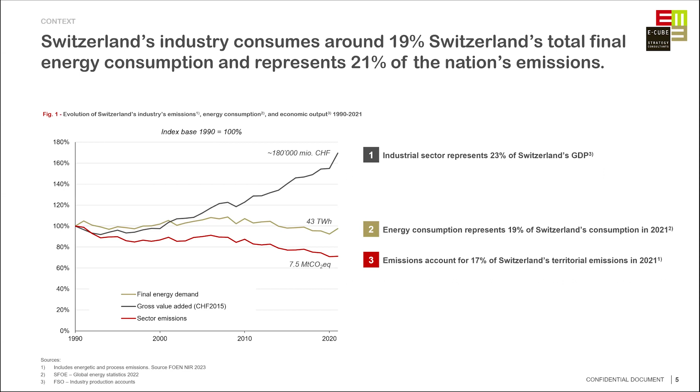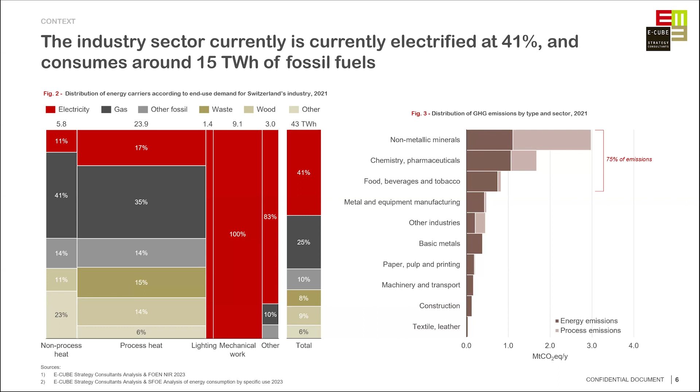And we can see that in terms of just energy emissions, the order is still approximately the same, which are the emissions that electrification will primarily focus on. So one might ask, why should we actually electrify our end uses and not just use other technologies?

So the idea behind it is to simultaneously reduce energy consumption because electricity is more efficient. For the same given service, we could decrease the final energy consumption, and this would affect our infrastructure demands. So if we use much less energy, we would need much less infrastructure. And this would also impact a lot the supply of energy in Switzerland, which is quite dependent on foreign supplies of fossil fuels, since we do not produce fossil fuels at all. And we do know that Switzerland's grid is quite low carbon and that the European Union's grid is getting cleaner.

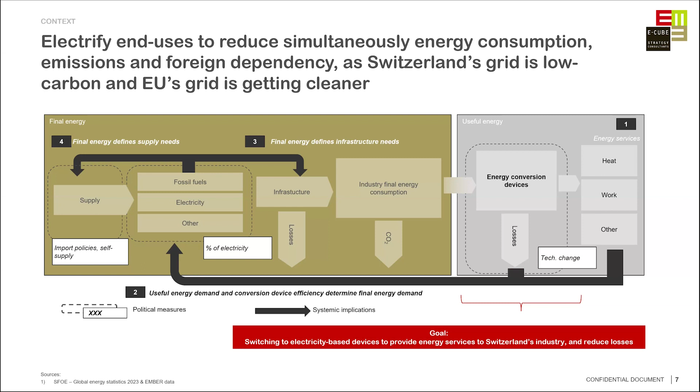So we're at, I think, almost 70% low carbon in 2023, if I remember well. So that's the goal: really switch to electric-based technologies for the same process to reduce energy consumption and simultaneously decarbonize because of the low carbon grid.

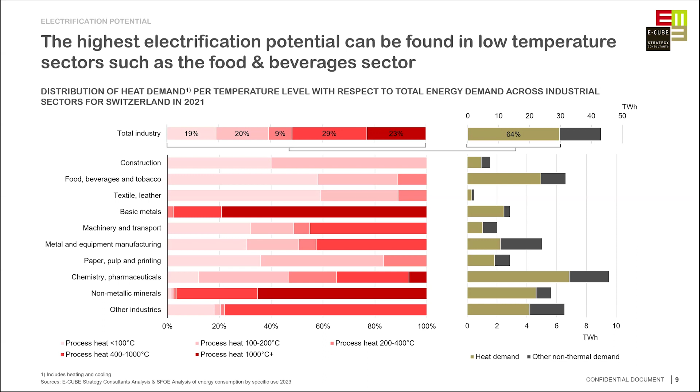And if we look well, we can see that the food, beverages, tobacco, textile, leather, and construction sectors have quite low temperature demands, and the food, beverages, and tobacco sector specifically has quite a high energy consumption, which is the second highest in Switzerland for heat demand. So we do notice that there is quite some potential, especially in low temperature sectors.

And so when we defined the electrification purpose of the industry, we really wanted to focus on a more realistic approach. Theoretically, we could replace all processes, electrify them all and get 100%. But that's not the idea behind the study. So first of all, we wanted to define specific stages of electrification. Stage one being just entry point electrification of non-process heat. So it's really heating buildings as well as hot water, everything that is not related to the processes themselves.

Stage two is electrification with more mature technologies, so what we would consider electric boilers or industrial heat pumps, and it goes up to 400 degrees. And stage three is more focused on technologies that don't have a high certainty of costs or technology maturity, and these go up to more than 1,000 degrees.

After defining stages of electrification, we wanted to define where we could and could not use electrification. So the idea was to not switch existing low carbon technologies that were already in place, such as industries that already use solar heat, district heating, as well as wood. And we do have some industries that use quite a lot of wood. And also some industries have specific resource uses, such as, as I said previously, cement industries, which use quite a lot of waste, as well as chemicals.

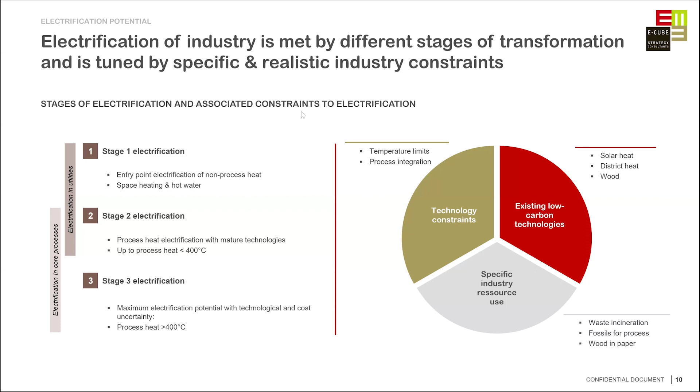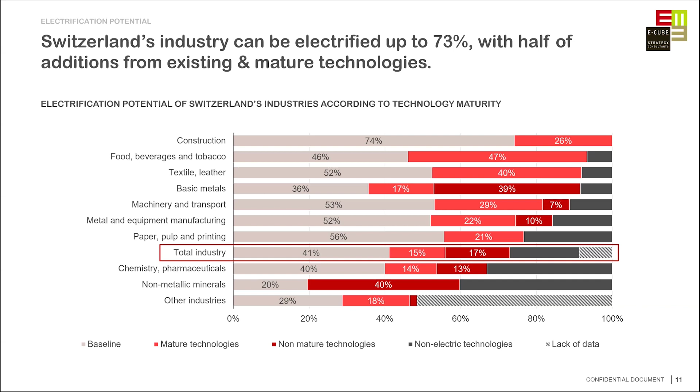So basically, what to remember is that there was also a lack of data for many industries. So the 73% could go a bit higher if we had more disaggregated data for the sector. But overall, we were at 73% of electrification potential. So what would this impact on the Swiss landscape?

So in 2021, as stated previously, we were at 41% of electricity, with 35% being fossil fuels out of energy consumption, so around 15 terawatt hours. And through each electrification, we're able to actually reduce final energy consumption by 21%, while simultaneously increasing electricity demand by 7 terawatt hours, which is approximately 11% of Switzerland's annual electricity consumption. So it's not negligible, it's still present, so around 10% of increase.

And what happens is that fossil fuels are basically virtually non-existent, with gas and light fuel oil being removed, the only remaining fossil fuels being very specific fossil fuels for chemicals industries such as naphtha or a little bit of coal for example, the ferrous industries, because we did not focus specifically on the process, just on heat production. So we do have quite an important result here. So reducing energy, our objective is reached while increasing electricity consumption.

And as we can see, the highest electricity consumption jump is between stage 2 and 3. And this is where actually electrification becomes less efficient as opposed to what we usually think of heat pumps. So the increase of electricity is much higher despite a small reduction of final energy consumption.

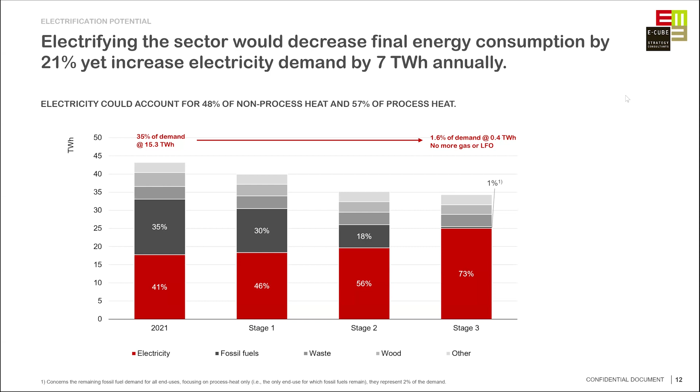So in terms of sector focus, the highest decrease, as we could really estimate, would be the food, beverages, and tobacco. So we can actually decrease their energy consumption by up to 44%, which is really consequent for such a sector. And also chemicals and other industries and metal and equipment manufacturing have some quite important decreases, but not for the same types of stage reductions. So important reductions for different sectors, but not equal reductions. So for example, basic metals or non-metallic minerals. So the sectors that are really heavy and high temperature don't have such a high reduction.

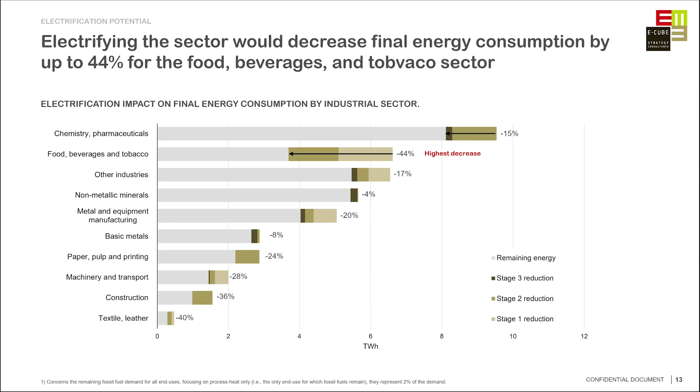And in terms of emissions, so we can actually quarter energy emissions. So really the core aspect of electrification, which focuses on combustion from fossil fuels, and reduce them actually by up to around 45% using only mature technologies. And what we see is that there's really two main things that are really important in terms of emission reductions from electrification. It's that process emissions still remain. So there is a need for alternative technologies to cover these process emissions, or electric technologies that can directly implement themselves within the process. Some technologies do exist, such as, for example, in the chemical sectors for ammonia production, but it's really difficult to find actually data and economics for these technologies.

And another aspect is there is quite an important focus on the importance of a low carbon grid. As you can see, if the grid is not cleaned up, so if we have the same grid as today and not 12 grams of CO2 approximately per kilowatt hour, we can have an increase of more than 1 megaton of CO2 per year. So it's really crucial to have a decarbonized grid.

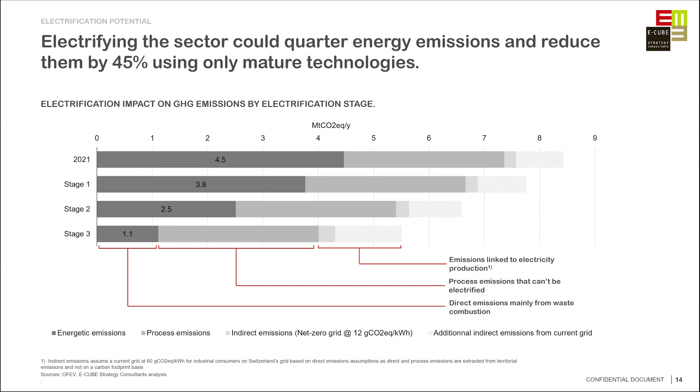And focusing again this time on industries, the highest decrease again is on the food, beverages, and tobacco. We can decrease their emissions by up to around 90%. Followed by actually metal and equipment manufacturing, because it's mostly processes that require heat, but not really specific processes that can be electrified, and basic metals as well, despite having a small reduction in final energy.

So we do see that there is an importance in electrification for specific sectors, especially low temperature sectors, which have the highest potential for emissions reductions. However, the results will really be dependent on what type of stage of electrification we're at. So for example, food and beverages, it's mostly stage 1, stage 2. So mature technologies, whereas non-metallic minerals, chemistry, or basic metals, it's stage 3, so much higher temperatures. So this will be really important in the economics and the feasibility against alternatives.

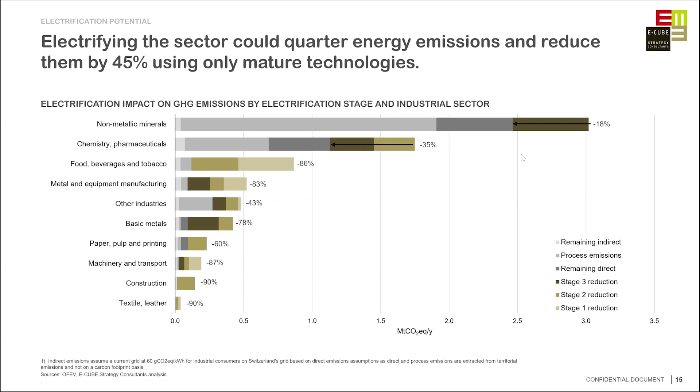So now that we've actually covered the potential, we can actually look at the conditions for electrification being competitive. And so the first thing is that success, so what I mean by success is really being competitive against other low carbon alternatives or fossil alternatives, is actually highly dependent on the electricity's competitiveness. So how performant electrification is and the cost of CO2.

So looking on the left side, we actually gathered a few actual projects in Switzerland, industries on heat pumps, for example. And the coefficient of performance of heat pumps is critical in terms of economics of electrification, because heat pumps have a high capex. So having efficient processes and reducing electricity consumption and overall energy consumption is really beneficial for the economics of electrification. And secondly is focusing on the CO2 tax. So when we reach approximately process levels of around 100 degrees, electrification is in the same cost range of gas in terms of levelized cost of heat.

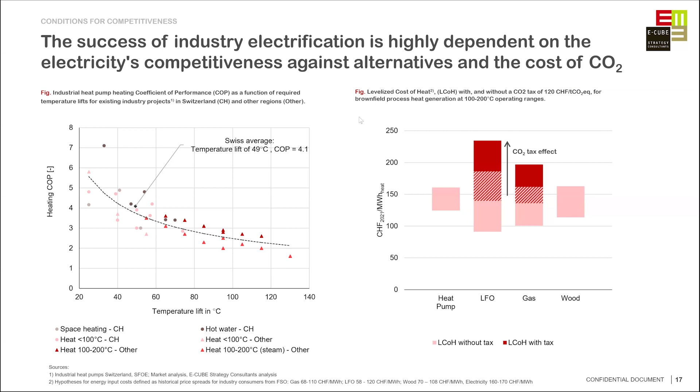So a CO2 tax would be really necessary to actually do a phase shift and actually render electrification cost competitive. So these are really the main aspects, which are performance and CO2 costs, but not only, as we'll see later on.

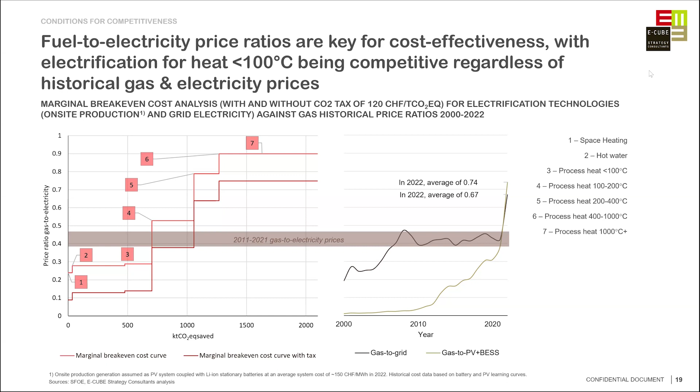And so, as I've given a few hints before, it's regarding industrial heat pumps. They are the main powerhouse of electrification, especially in Switzerland, which has quite some low temperature sectors. They constitute around 86% of the energy savings that the industry could offer, and are capable of saving 5.3 terawatt hours of gas, which is around 50%, really not negligible, and around 1.7 terawatt hours of light fuel oil, and only represent 23% of the increased electricity demand.

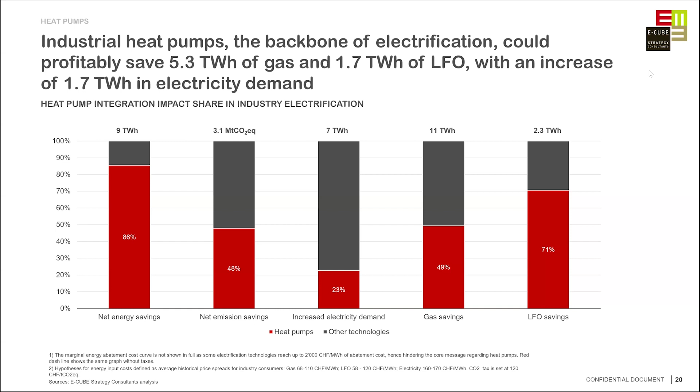So here, electrification through industrial heat pumps is really the core aspect in terms of economics. They offer an electrification potential for the industrial landscape that is competitive. And the idea was to delve a bit deeper into how to render industrial heat pumps competitive.

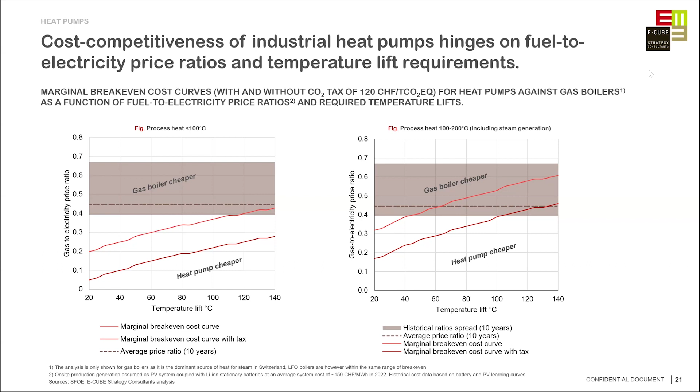So now that we've seen the conditions for competitiveness, we can focus again on the food and beverages sector, which was, let's say, the star of the show for the industry sector in Switzerland. Considering all technologies, not only heat pumps, we have an average abatement cost of minus 113 francs per ton of CO2, given average historical conditions, mostly given by industrial heat pumps. So there is really an important aspect on industrial electrification, and a big potential for emission savings as well as cost savings through electrification.

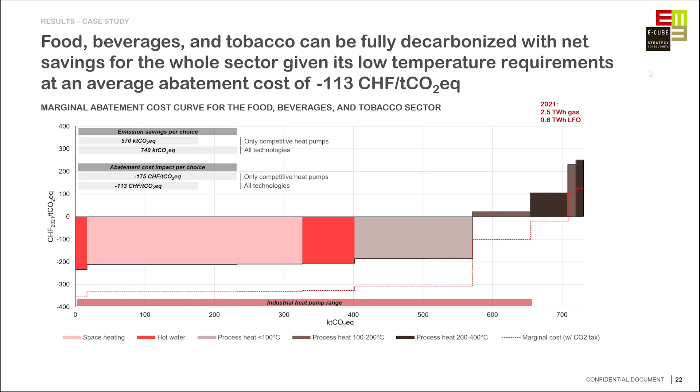So not only positive aspects, but we also have some challenges with regards to electrification. The first point is electrification technologies require substantial investment costs compared to standard boilers. Given a small market analysis we did, industrial heat pump investments, not only the equipment cost but also installation and labor costs, are at around 800 to 1,200 Swiss francs per kilowatt of heat capacity. This does not include heat pumps over 100 degrees because they're not present on the Swiss market. Whereas gas boilers and light fuel oil boilers have investment costs lower than 200 francs per kilowatt. So we see a huge investment gap.

So despite having overall economics, let's say a levelized cost of heat, that is more performant, there is the issue of investment costs for industrial sectors, which usually tend to look at payback times of less than 3 years. Having such high investment costs hinders electrification because we can reach payback times that are really high. So this is an important aspect that needs to be integrated when promoting electrification.

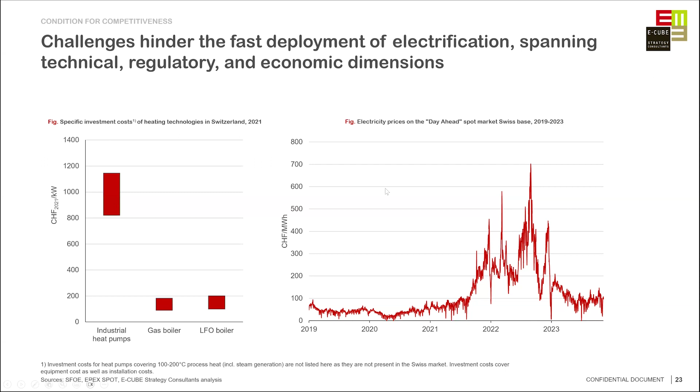And the second aspect is the electricity prices. Looking here at the day-ahead spot market on the Swiss electricity market, we see a lot of volatility, especially since the end of 2021 with an explosion in electricity prices. Industries tend to focus on the quality of electricity, which is really crucial, and it was quite tricky for the last 2 years, as well as the stability, the volatility of electricity, and obviously the price of electricity. These are important aspects that could hinder electrification in terms of economics.

So overall, to resume the presentation, electrification of Switzerland's industry is technically possible, and realistically it could be electrified up to 73%, with 56% from existing and mature technologies. Electrification can lead to a decrease in energy consumption and can halve sector emissions. Overall, electrification comes at a cost of 100 francs per ton of CO2 abated, which is heavily skewed by non-mature technologies, as we've seen on the marginal abatement cost curve. But with current mature technologies, the cost of abatement is negative and hence competitive, and it could decrease overall emissions by around 30%, not just energetic.

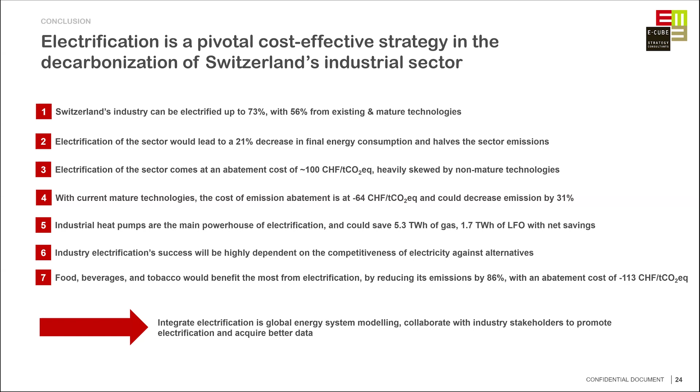And industrial heat pumps are the main powerhouse of electrification. They could save around 50% of current gas consumption and around 70% of current LFO consumption. But electrification depends on specific conditions for it to be competitive, which are performance, the cost of electricity, and the cost of CO2. So yeah, any questions?